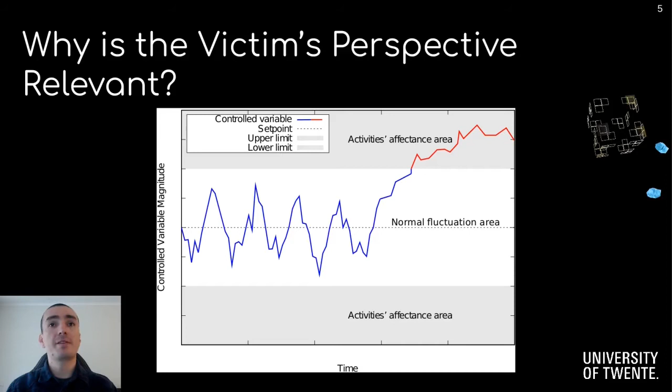However, there is this gray area at the top and the bottom of this plot. And the problem is that once the physical variable crosses those thresholds, we can say that the business that is being supported by this building service is affected in some way. Now, coming back to the original question of why is the victim's perspective relevant, well, that's because the boundaries for each variable are different per victim, namely the organization that is being targeted.

To illustrate this further, as a concrete example, this attack on the heating system of 2 residential buildings in Finland a few years ago caused the temperature to drop below the recommended values for residential buildings, which is between 20 to 24 degrees Celsius during winter. If these were not residential buildings, but perhaps unoccupied spaces, such as a data center, for example, then the recommended temperature values would be different. And this is exactly what we mean by the relevance of the victim's perspective.

Now, in this paper, we argued that the testbed and the scenario should come together to achieve basically 3 things. First of all, a deeper understanding of the consequences of attacks. Then, in case defensive tools are being demonstrated using the testbed, it is clearer where and when to use them. And perhaps one of the most important reasons to embed the scenario on top of the testbed is that hypothetical attacks become concrete threats. So it's no longer about a buffer overflow or malformed packets that you're sending to a BACS infrastructure.

It's now about physically hurting people or sabotaging organizations. We developed our testbed in 3 stages. First, we defined the requirements, then we moved on to the design phase, and finally we built it. We implemented our design. Let me start with the testbed requirements.

The first requirement is that our testbed must be capable of modeling different scenarios. Now, our goal was not to build a testbed that models a single use case, as it is typically done for industrial control system testbeds. Our challenge was to build a testbed that can model different scenarios using hardware and software commonly used in real BACS.

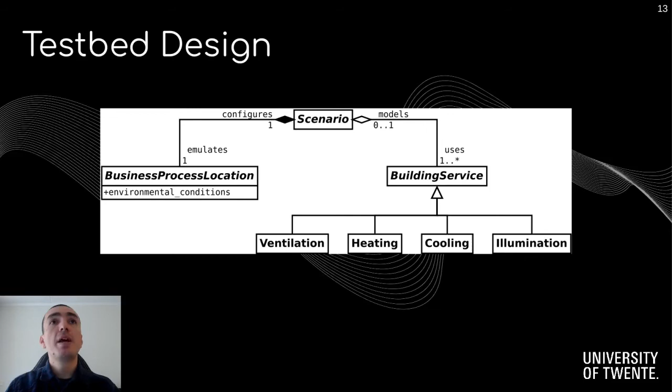The next thing we had to design was the physical testbed itself, where we could execute the kind of attacks that we are interested in, namely the inter-process control attacks. We designed our testbed using the 3D modeling software FreeCAD, and the goal of these designs is to make sure that there is enough space to fit all the components and wires that we need.

For the sake of modularity, we decided to split our testbed in two components, which can be seen here in this slide. On the left-hand side is the model of a mechanical room where we have a heater and a cooler, which represent what in a real building would be a boiler and a chiller. And on the right-hand side, you can see a 3D model of a building room of our testbed, which will basically emulate the different business process locations, such as the lecture hall or the operating room or the data center. Now, let me start with the description of the building room.

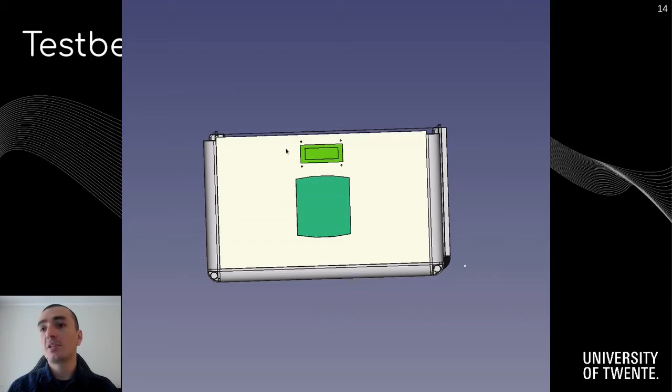In the front panel, you can see an LCD on top, which will display the current configuration of the testbed, namely if this is currently configured as a hospital operating room or a lecture hall or any other scenario. There is a hole where we can insert a thermostat, which would be the main controller of our testbed. Also, in the bottom plate, you can see different power supplies because, of course, we have to provide power to different components in the testbed.

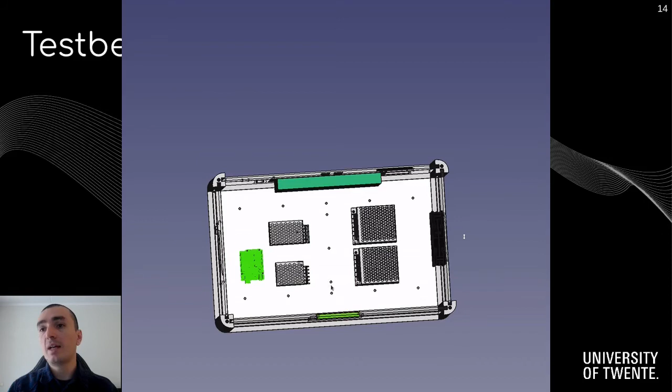And there is also an Arduino, which controls the LCD display in front and regulates the power to the high-power LEDs in the back on both sides of the router that you can see green in the back. Also in the back, we have a power socket inlet, two RJ45 connectors, one RJ11, and one DB9 connector.

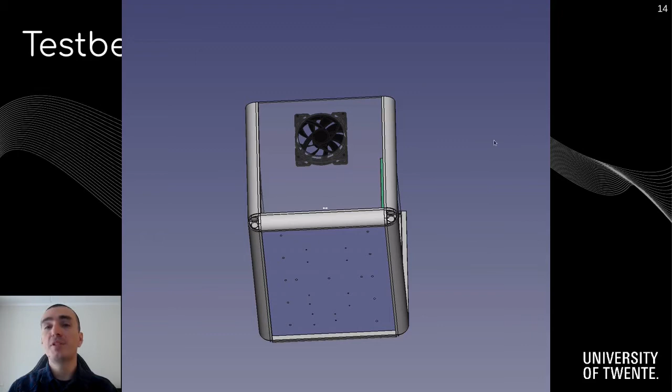On the right-hand side of the testbed, we can see here a fan, which is, of course, the main actuator of the ventilation service. And on the left-hand side, there is basically a hole where we can physically connect a pipe that will connect the building room, namely this room we're seeing now, with the mechanical room on the other side.

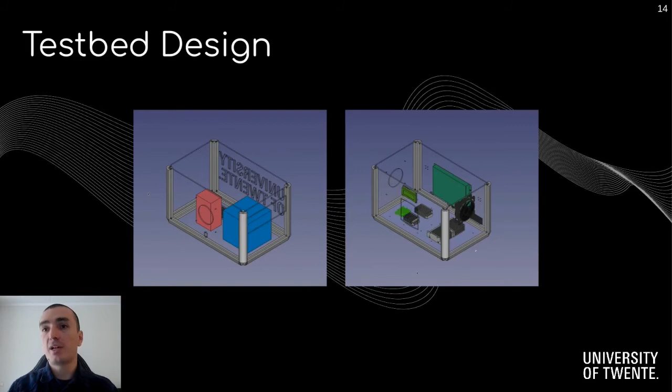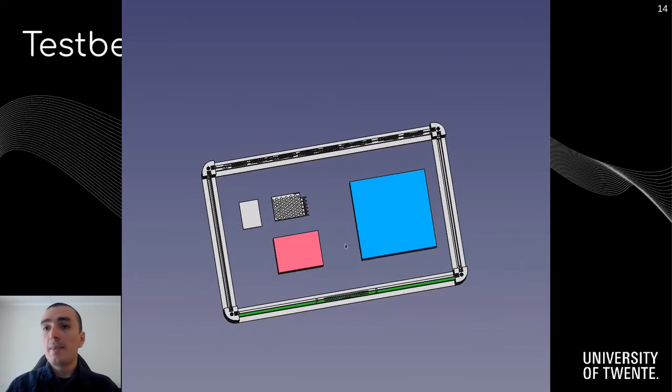Now, in the mechanical room, you can see in the front panel a hole that pairs up with the hole that you saw in the building room. There is also an RJ45 here because the electrical signals are sent using a UTP cable. And here you can see a power supply as well, a solid-state relay, heater, a cooler. And because the cooler works with cold water cooling down the air, we have this hole here to make it easy to pour water into the cooler.

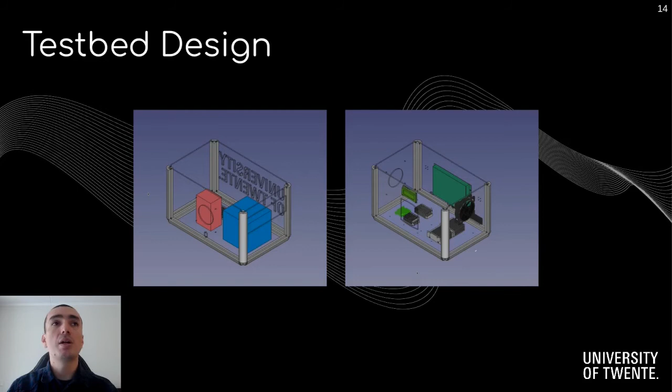In the back plate, we have a power socket inlet as well, and as an air intake, we use the logo of our university. With this design, we have a set of building services that will allow us to execute the inter-process control attacks that we want to execute. The design that we developed materializes with the implementation that I'll describe now.

Now, the thermostat is connected to the different actuators using electrical signals, and these actuators are basically the heater, the cooler, the lights, and the fan. And since those actuators do not have a BACnet address on their own, they cannot be attacked directly. So the goal of the attacker would be to affect those actuators by means of the thermostat.

And in addition to that, connected to the BACnet router, we have a modem that will allow us to connect our infrastructure to the public switched telephone network. And this is, of course, with the goal of having an attack surface as broad as possible so that the attacker can execute in many different ways the inter-process control attacks that we are interested in.

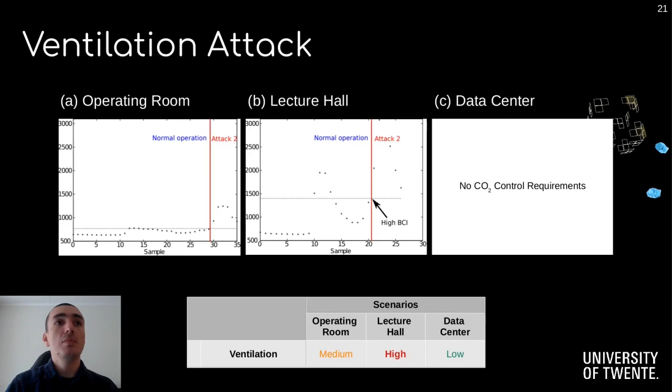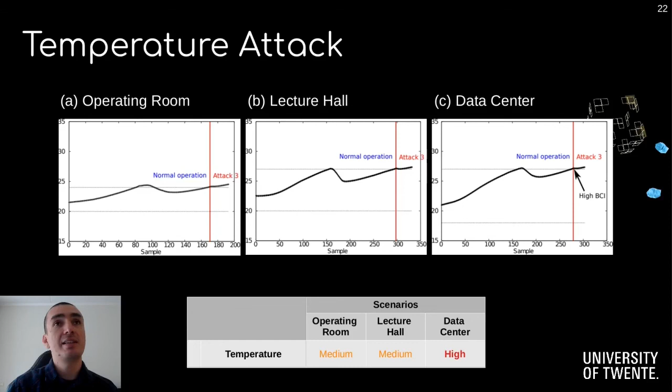Let me conclude with a few takeaway messages and lessons learned from our work. The most important takeaway message of this presentation is that a testbed must come along with one or more scenarios, because this will give you a better perspective for the research that the testbed will uphold in the future. In this particular paper, we have shown the usefulness of those scenarios on top of a BACS testbed to perform simple impact assessments, but other research can benefit from those scenarios as well.

For example, to develop robust intrusion detection systems that consider the context as part of the detection mechanism, to perform realistic attack and defense training for red and blue teams, and to provide illustrative attack demonstrations where you not only show the effect of the attack on the physical components of the testbed, but you also consider some of the scenarios where you envision this attack might take place. Just to stress this further, the hardware in our testbed is essentially similar to the hardware in existing testbeds. What's different is the addition of scenarios, which has been overlooked in previous BACS security testbeds.

One limitation of our testbed is that we have a few building services, but this is of course because there is a trade-off between the fidelity of the emulated business processes and the complexity of the testbed that you're willing to have. And finally, one note on the particular use case that we gave to our testbed, namely the computation of business continuity impact scores. It is precisely that those scores are linked to physical variables and not to the specific cyber attacks. And this distinction is important because this decouples the overall goal of the attacker from the specific attack procedure employed. For instance, the impact of shutting down the air conditioning in a data center is the same regardless of how the attacker does it.